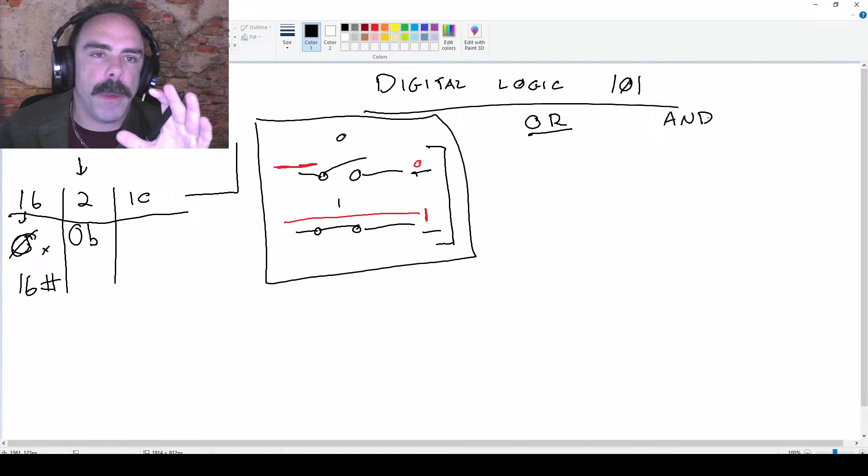So the first thing about how these things work - if you have these inputs, you have blocks and operations. Some of the core basic ones, the 2 most fundamental, are the OR and the AND. These concepts of ORs and ANDs are everywhere in logic in general and in algorithms. Even if you're writing Python code, you're going to use AND and OR operations a lot.

So the fundamental thing of digital logic is a thing called a truth table. If you want to take an OR operation between 2 inputs, from a symbolic standpoint you will have 2 different inputs coming in, input A, input B, and on the output side we'll call it Q, because that's kind of the Siemens realm of it. An OR block has a symbol that has a little curved line, like that.

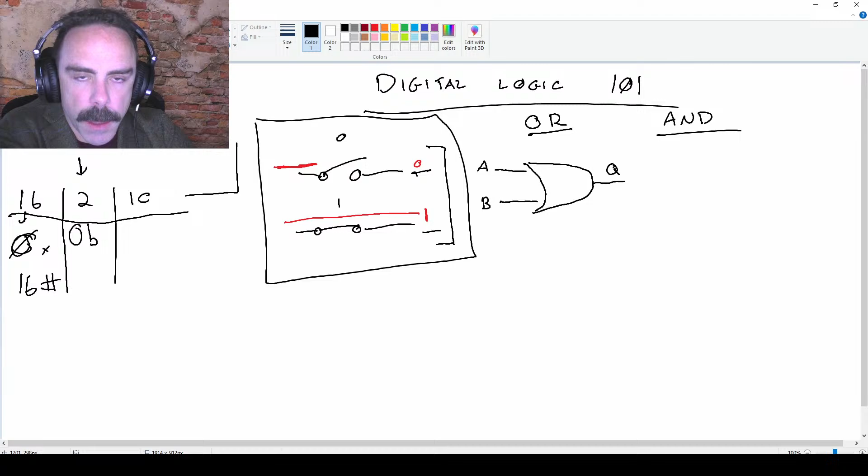And there's a thing called a truth table. So if we were to say, what are the different options for inputs A and B, because of this kind of symbol we know that each one can have a 0 or a 1. So you can have A be 0, B be 0, A be 0, B be 1, A be 1, B be 0, and then both of them 1. So those are all of the options for our inputs A and B. Now this is called a truth table.

The reason it's called a truth table is because we want to see when our output is 1, and in logic our output would be true at that. So when is our output going to be true? What combination of inputs, based on what type of operation, is going to make our output Q true? For an OR operation, think of it as if either A or B is true, then the output is true. Fairly simple - if either one is true, our output will be true, and the only one that will be 0 is when both inputs are 0. Pretty basic, pretty simple stuff. This isn't supremely groundbreaking, but it's fundamental to build up to greater concepts.

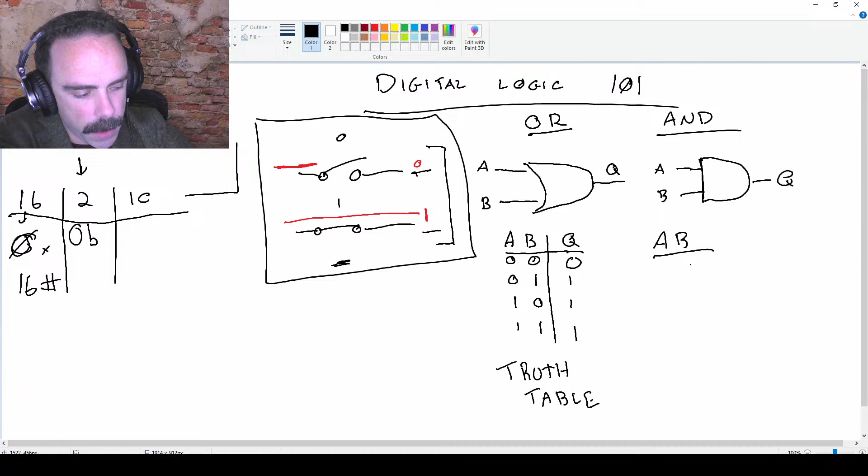So an AND block is similar. We have A and B, our symbol is a little bit different, a straight line. And then Q. Its truth table for 2 inputs is always the same: 0,1,0,1,0,0,1,1. For an AND operation, the output will be true if A and B are true. So we can go through here, and the only time this will be true is here - everything else does not meet that qualification. Fairly simple.

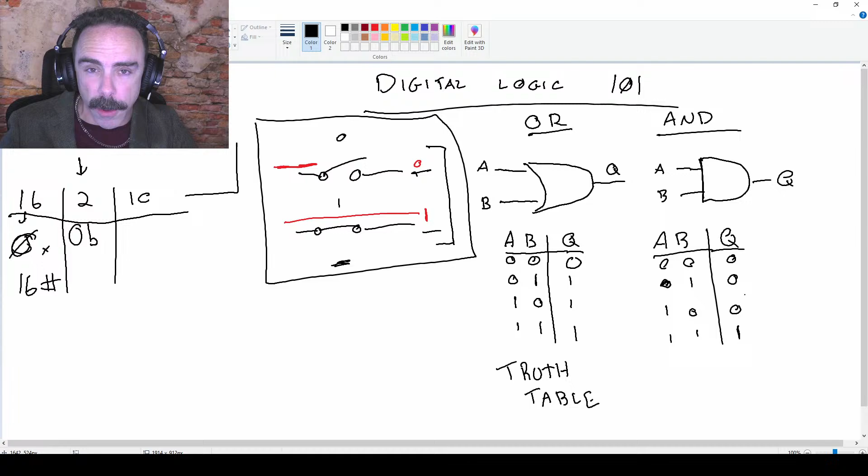Again, if you have any questions at this point, it's fairly basic. You've got a transistor that can either be on or off, and you're creating these logic devices and logic tables. Right now none of this really ties together to anything, but what they end up doing later on is building up a structure that actually makes this logic. We're not going to go into that - we're just going to get these concepts so that if you have a conversation with someone talking about this sort of stuff, here's the basis of it.

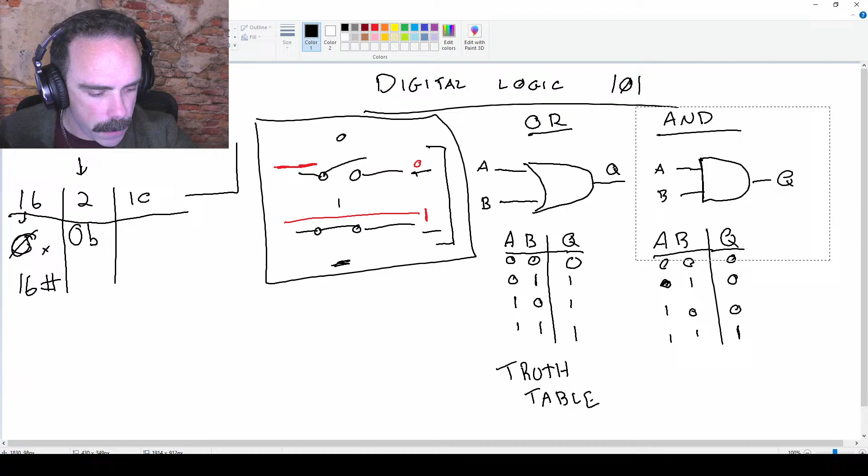So let's go through and clear some of this, and let's recopy over here what we had.

Because ultimately, we could do this whole sort of thing in actual switches. Like a PLC is kind of a modern version of what's called relay logic, because with a physical relay you can actually do ladder logic, the same concept with just relays. If you go into an old plant - there's a couple of steel mills in Alabama, metallurgical plants I've been into - they still have processes being controlled by relay logic. They're actually using this sort of logic to make decisions on how to run their plant, which is kind of wild, and it's all physical relays, no PLC, and it's crazy. The transistor was invented in like the 40s, so all the way up until really the 70s and 80s it was all relay logic, which is insane.

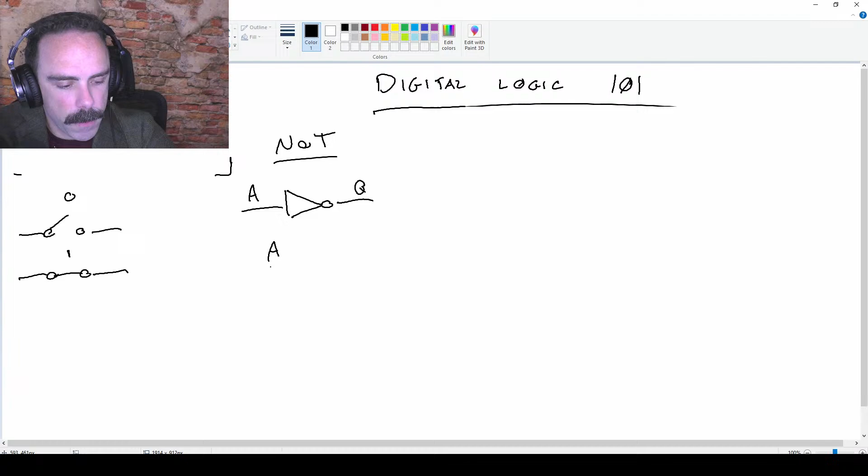So getting off topic, but back to digital logic - the next thing we'll talk about is we have what's called a NOT, and all it does is it takes one input, looks like this, and the output. So the truth table for this, if A is 0,1, it's just going to invert it. That's fairly simple.

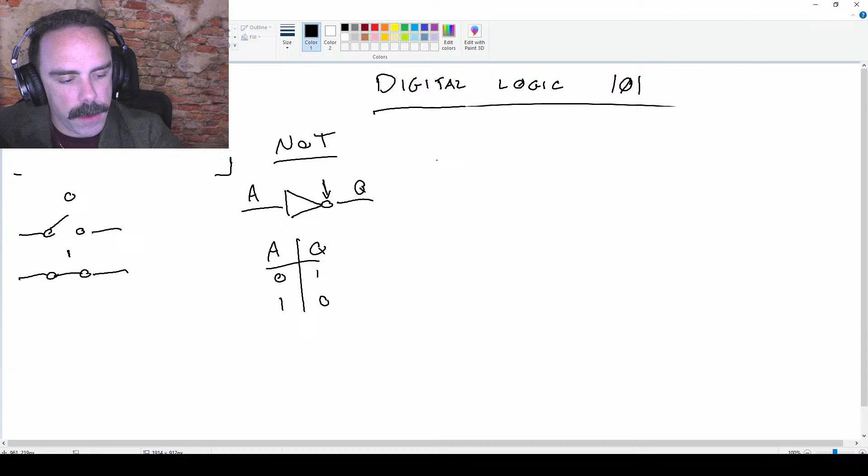So here's the thing about it - the NOT is really designated by the little dot there. And so what you can do is you can stack this NOT onto an OR like that, and an AND like this, and you will create...

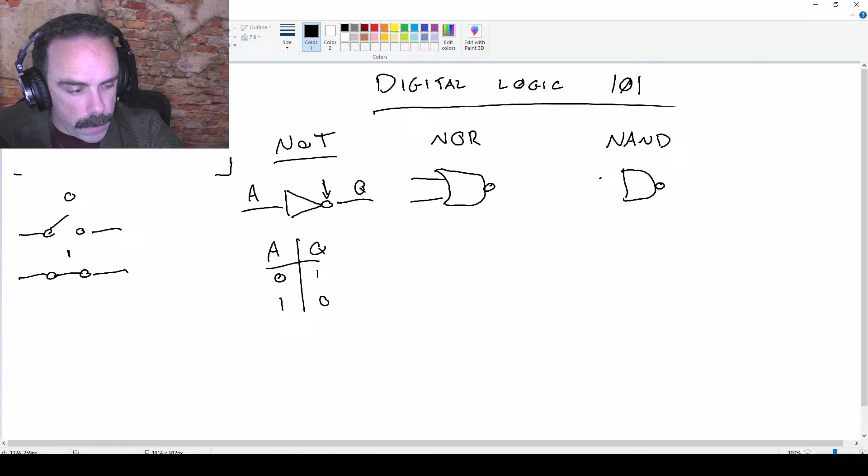So this is an OR, now it's a NOR. This is an AND, now it's a NAND. And the truth table for these guys: A, B, still the same, 0, 1, 0, 1, 0, 0, 1, 1. Now, normally, a regular output for an OR would be either or. So it would look like this. Well, for a NOT OR, a NOR, it's just the opposite.

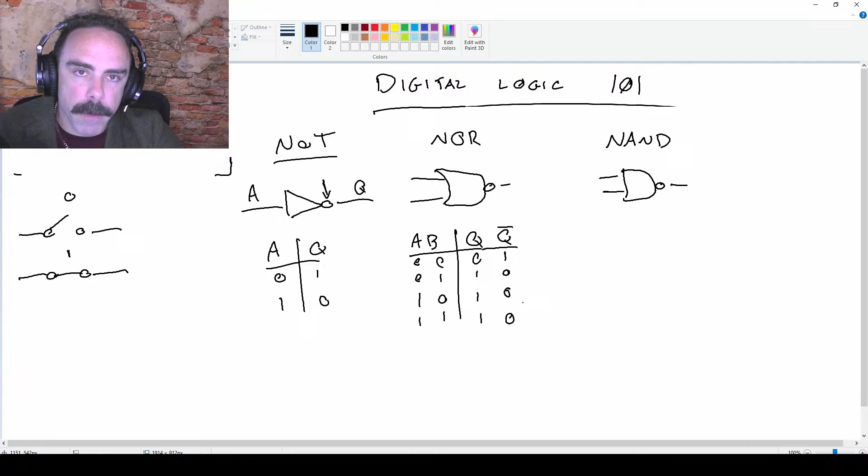Fairly simple. This little symbol here, that's another designation for NOT. So if you see a bar over the top of an input or an output, it's NOT. Now, you can build up pretty complex circuits by doing some interesting stuff, because this little block right here doesn't have to just stay there. It can be over here, it could be here, get all sorts of stuff. But we're going to talk just about that right now.

So the NAND, in a similar fashion, A, B. So we'll do Q and then Q NOT, same way, just to kind of get the process. So B, 0, 1, 0, 1, 0, 0, 1, 1. So Q, both of them have to be, it's an AND, right? So normally it would be like this. Right? Because it has to be A and B in order for it to be on. So that's regular. So we take it and we go 1, 1, 1, 0.

Now, that's the core concept behind logical operations. And the reason we go through this is if you really want to get into learning about logic, and we'll tie those later to the PLC concepts, but when you're doing ladder logic, an AND would be a rung of logic that looks like this: A and B and then a coil. So this would be the equivalent of an AND, right? If you're used to ladder logic, this makes sense. A and B both have to be on in order for Q to turn on.

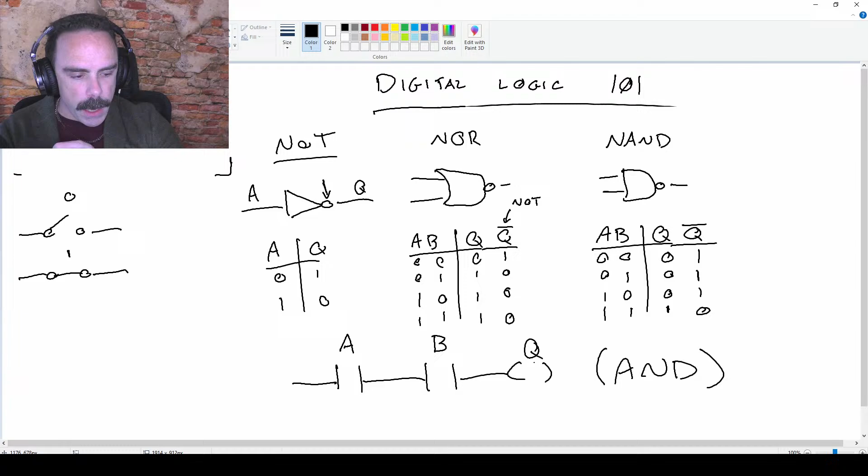Well, here, let's see if we can get a little bit more. If we have this logic, oh, that is an OR, right? So same concept, same logic. And again, with a PLC, especially in ladder, it is based around these logical functions. It's based around logic. And so that's why PLCs and digital logic get pretty close to each other, tied pretty close in. So that's why we're talking about it.

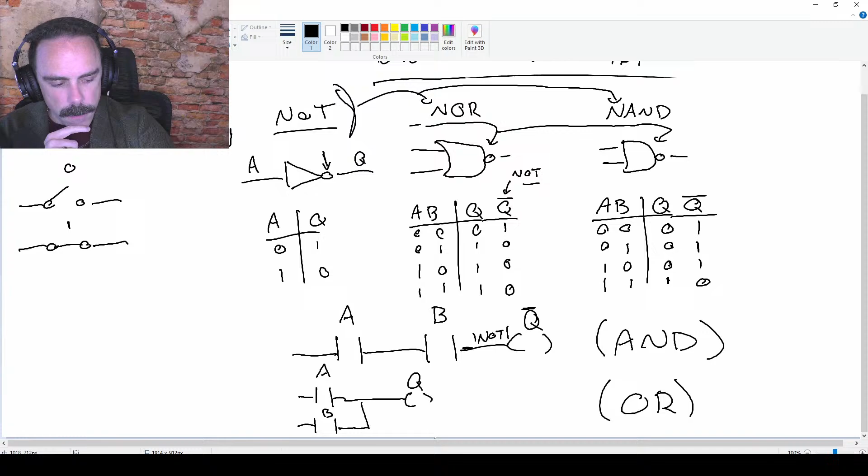So same way, we put this little NOT symbol here, and then we added it to here. And essentially we added it like this, right? So we've gone through and looked at this. And so if we were to invert this, and in PLC there's a NOT here that inverts it, you could get a NAND, and if you could invert this by putting in this little NOT like that, you could get a NOR. All right, well, that's one way to do it.

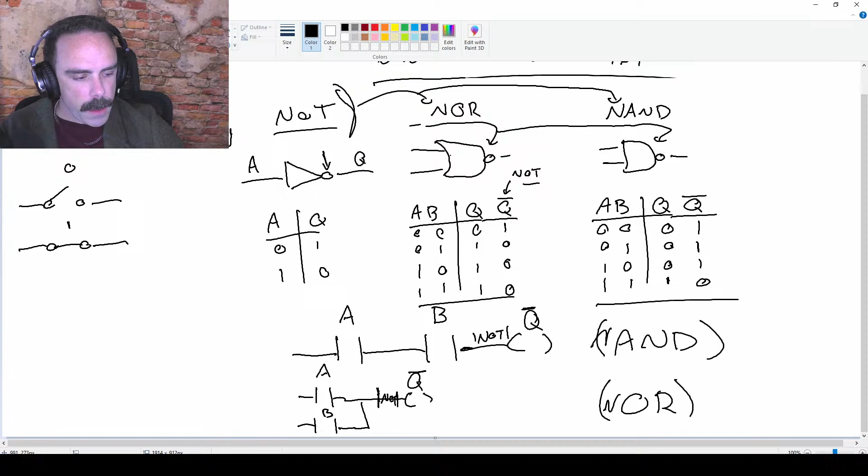Or you can do some logic with our truth tables. Remember I said that we could put the NOT on the inputs? We could do this, right? We could put that little NOT on the input. Well, let's look at the truth table for that, if we were to NOT both inputs of an OR. So A, B, normally our inputs would be 0, 1, 0, 1, 0, 0, 1, 1.

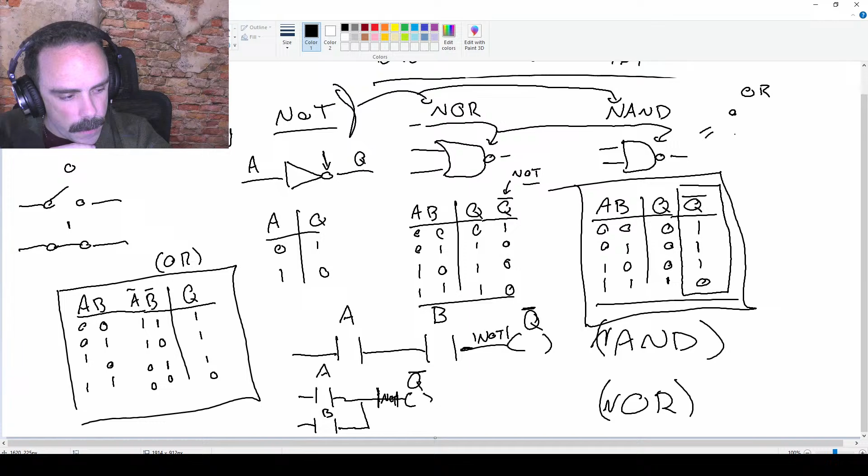Let me do the same thing that we did over here. Let's NOT our inputs. So the NOTs would be 1, 0, 1, 0, and 1, 1, 0, 0. And if this were an OR with both inputs NOTted, it would look like 1, 1, 1, 0, right? Which, oh my gosh, look, that truth table is the same as this truth table. So a NAND must equal an OR like this.

What does that have to do with anything, right? Okay, you're like, okay, cool, that's so useful. Well, if you take that same logic and bring it down here into the PLC world, guess what? Instead of having to do this NOT here, you could just do an OR and invert both inputs. So that's pretty cool. And that's all we're going to do.

There's a ton that you can go into, and it's called reducing functions, reducing logical operations. And you can cascade these things, really complicated. But if you want to start playing with those sorts of concepts, use these truth tables and those three blocks, the AND, the OR, and the NOT, and just start playing around with them and write different combinations of truth tables.

And you might discover things like an OR with the inputs NOTted, so inverted, becomes a NAND. Things like that. Guess what? You might find a relationship between a NOR and the AND block. Probably the same thing. And so you don't have to have these sorts of output inversions, because you can change the way your code is structured and then invert the inputs like we did here.

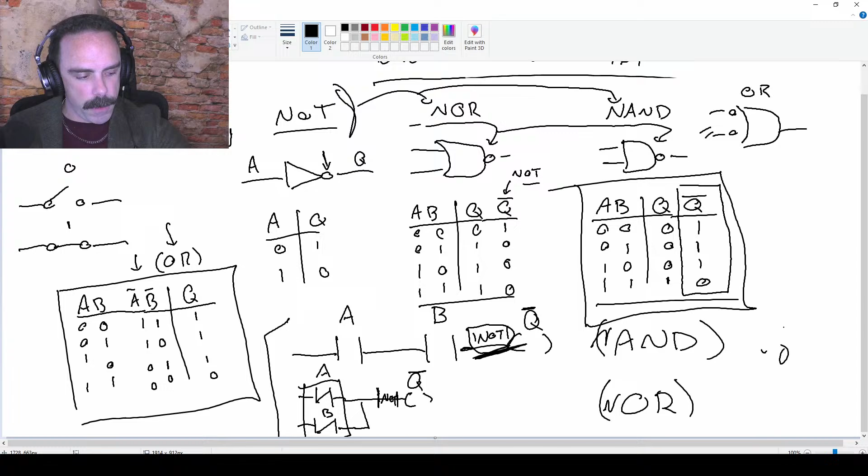But let's get back to the next part of what I wanted to talk about, because we've been going for about 30 minutes now, and I started to talk about number representations before. I'm not gonna go control A yet. I'm gonna do this and then hit control A and then delete everything. We're gonna start fresh, because we're gonna talk about number representations.

By the way, I kind of got, not really in trouble, but had an issue with registering some documents, and apparently my L's and C's kind of look the same if I get in a hurry. So I need to be more careful. Also, my zeros apparently look like E's. Sorry for that. I have terrible handwriting. I think we all do. If you have bad handwriting, raise your hand in chat, because I think every engineer is required to have bad handwriting. Let me get my distraction device undistracting. Wow, that probably sounded terrible.

So next thing we're going to talk about is number representations, and we kind of hinted at it. The three that we deal with as programmers in automation programming are binary, decimal, I don't know why I wrote it that way, binary, decimal, and hexadecimal.

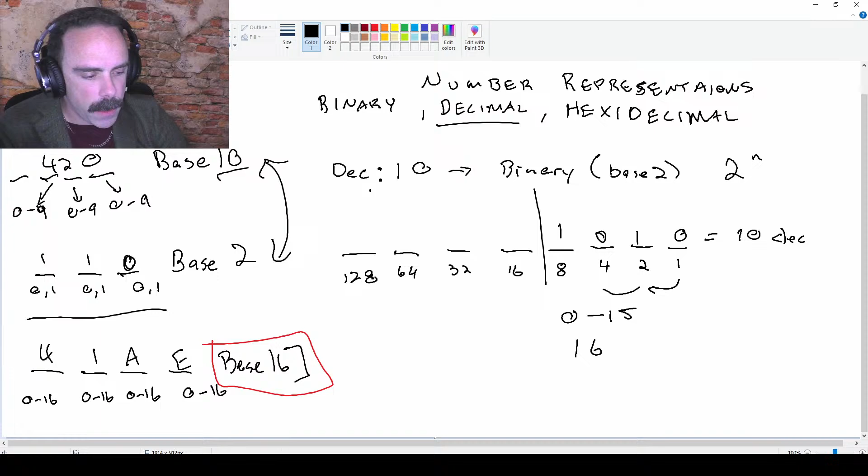And there's a reason why a nibble would be important. Because these 4 bits represent 0 to 15, or 16 total places, right? And I kind of highlighted this earlier. 16 is kind of an important number. It's that base 16 number here. So let's take this. This is 10. So we could represent these 4 bits as the decimal of 10, and that would be a hex number A, right?

And then if we had, say, a byte, let's just throw some random bits in here. Let's look at this next little thing. So let's just start adding. 1, 2, 4. So 5. 5 plus 8 is 13. So A, B, C, D. So this could be represented by D, because that equals 13, right? A, B, C, D. Yep, 13.

13. 10 is A. 13, is that right? If that's wrong, yell at me in chat. Just boo me. But so now this big number here, which would be fairly kind of difficult to add up in binary, actually just comes out as DA hex. So hex representation DA. That's what this big binary number is here.

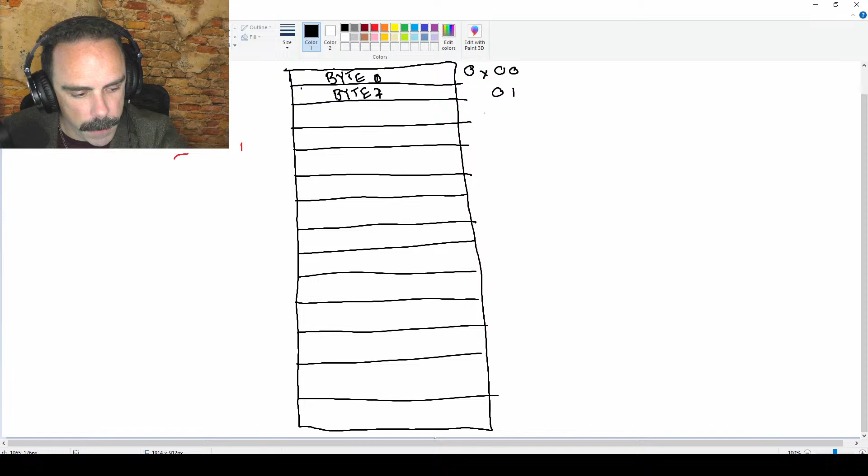So we're going to call this byte 1, byte 2, so forth and so on. Except we're going to start at 0. So this is going to be 00, 01, 02, 03, 04, 5, 6, 7, 8, 9, A, B, C, D. So these numbers over here, we'll call these our actual address.

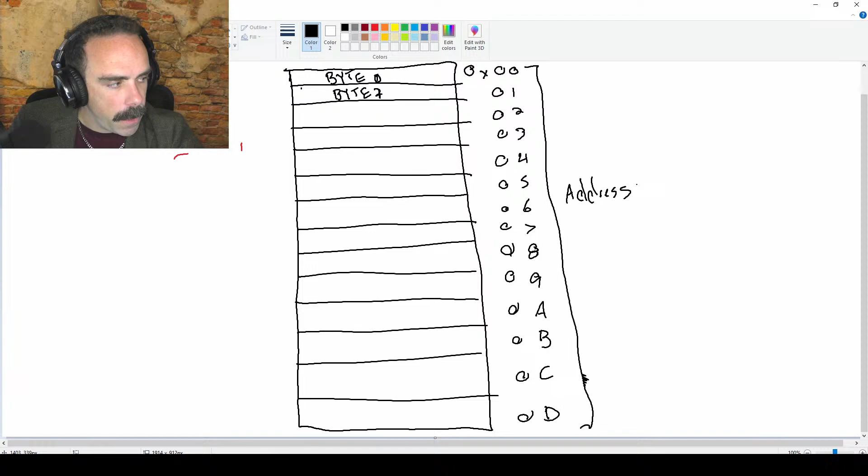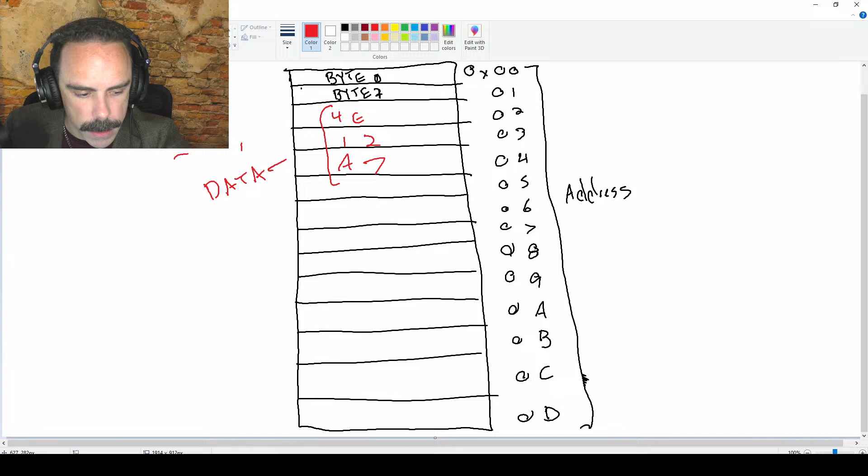So this is going to be our address. Now, what is inside of them is going to be 8 bits in these bytes. So this could be 4E, 1, 12, A7, blah, blah. So this is the actual data. What's in red here is the data. And those are two different things. The address and the data might be the same, probably not.

Because the address represents where it is in the physical memory. Your physical memory is just a set of what are called registers. And in the computer architecture world, those registers have an address. And each point as you're going down through contains data and some extra stuff for how to actually address it. So it'll have an address and a data. We're not going to go too much into this, but the size of your address means how much you can actually store.

It wasn't too long ago that 64-bit processors weren't really available to the common user. Most everything was 32-bit. Well, that limited your addressable memory space to a little over 3 gig of space. So you had to start doing tricks in order to address anything over 3 gigs. That's why you could only have 4 gig of memory, because of this address only being able to be 32 bits.

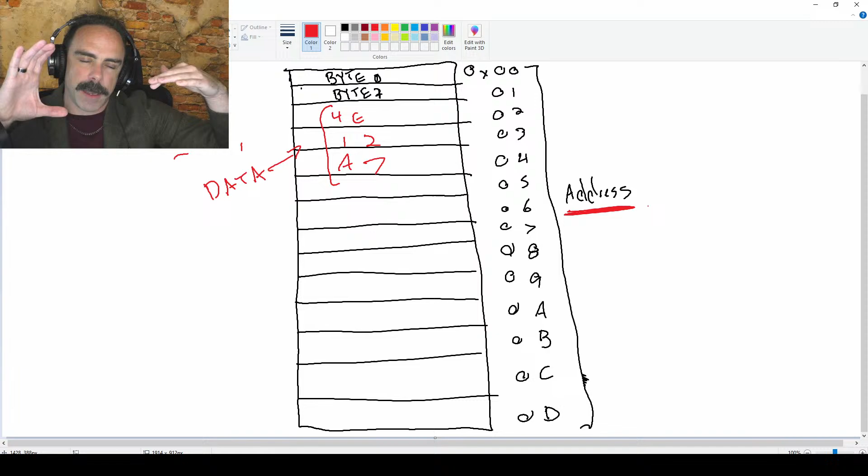Back before, imagine you only have so much space that you can physically work with on a processor, because you have all these transistors that make up all these logic things. You can either make your processor bigger, or if you want to add more stuff, you can make transistors smaller. So that's kind of what processor technology has done over the years, making transistors smaller so you can put more stuff in that space.

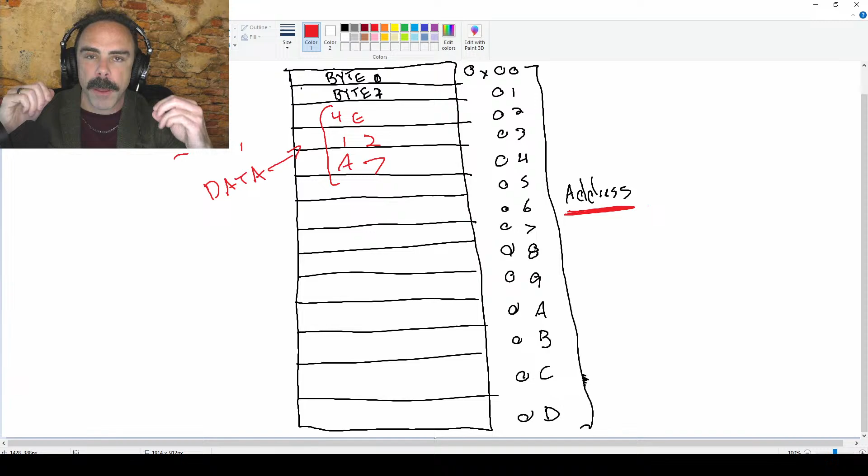Once transistors got small enough that we have this space to add extra instructions, it becomes less costly to actually take up the physical space to make a float multiplier. To do float multiply very efficiently, you need its own specific little area of the chip. It's like buying downtown New York City real estate, very expensive, so it better be worth it. That's the biggest thing with older processors, more so than the bit structure—it just made it even more expensive.

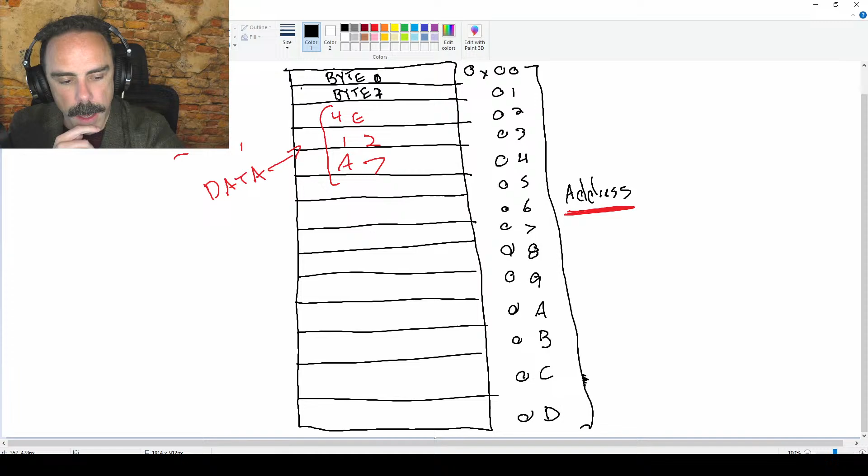So back to this kind of addressing. We talked last week about pointers, and the core way a processor works is it has this space, call this our memory space, but then call this memory. Well, you have this other space that's called the program space. And it's the same thing—all it has is a bunch of addresses and data. So it's addresses and data.

What your code does is, in layman's terms, it says: start at this point in the program space, do this instruction, then this instruction, then so forth and so on. So it's literally just a list of instructions—a list of these machine code instructions that we had before.

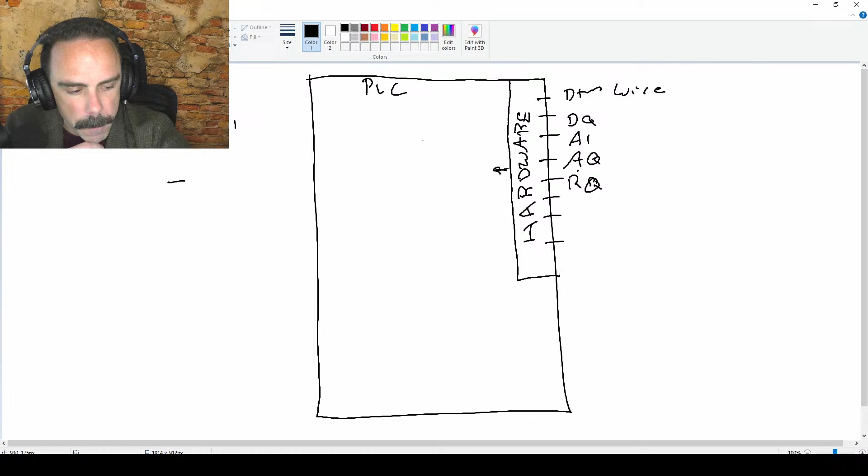And this is the actual hardware, an actual processor that is interfacing into that physical wire, like that. Here, that then goes into a place called your process image table.

And your process image table is just a place of memory. Remember, when we're talking about memory, it's just a bunch of addresses that store data. In this case, the process image table communicates with all of that hardware in some shape, form, or fashion - doesn't matter to you right now - and it brings in copies of all of this data. So there is a process in between here that goes out and updates each one of these individual things.

That's the process image update. That is a process that you don't mess with. You can configure it if you like getting yourself in trouble, or if there's some specific reason - like sometimes you need a very specific analog updated faster than normal, that's where you would go in and change that sort of stuff. Very advanced stuff, don't worry about that. That's mostly taken care of for you 99.9999% of the time.

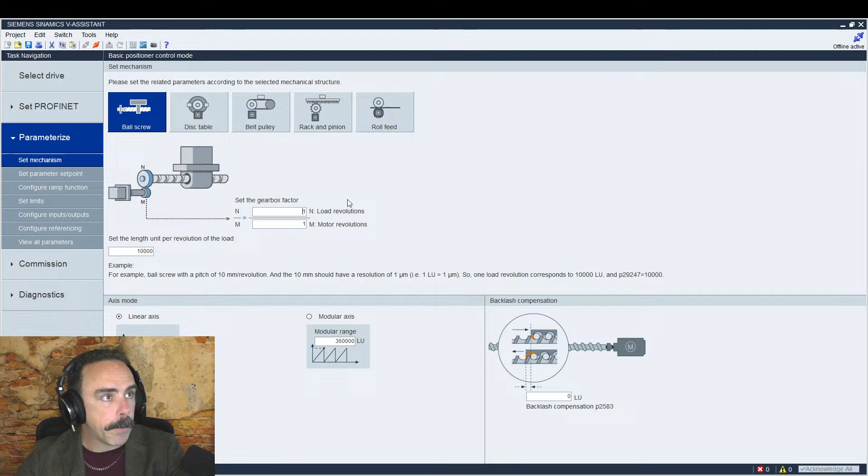Here's kind of the parameterization that you're looking at, and I won't go too deep into this, but I guess I probably do need to go a little bit deep into it. Let me move it down so I can talk about this, because this is probably the most important thing in Epos - getting this set up correctly. Oh, that is totally the wrong thing. I want that, and I want to move myself over here like that.

So what we have is our gear ratio - that's the first thing we have here. This is, again, probably going to be the most important thing if you're using Epos. And if you've ever used Epos, you're screaming 'yeah,' because if you get either of these things messed up, it messes up everything. So don't do any programming until you fully understand what's going on here. Say it again: don't do any programming, because if you change this number, all the numbers in your PLC program will change. If you change this, all the speeds you're actually physically running at will change.

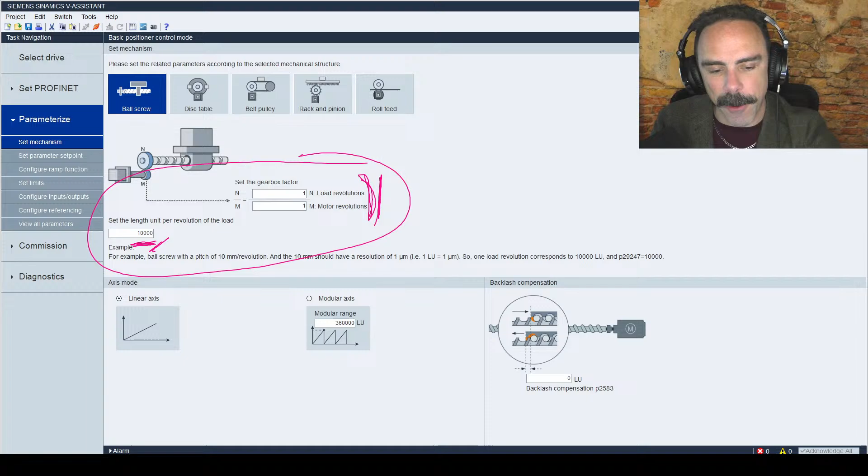So yeah, just please get this set right. This is your total gearbox factor, your total gear ratio. This ratio is on your motor revolutions. You can have a gearbox, a pulley - like a pulley reduction - then a slide, like a rack and pinion reduction. You can have all of these reductions.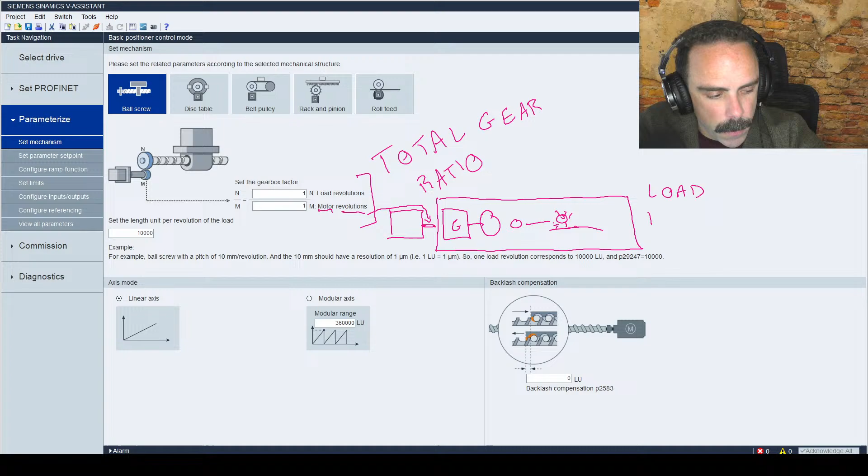You have to group them together to say how many motor revolutions equals one what's called load revolution. Now, in a rotary axis, this kind of makes sense, but we've got to talk about what in the world

Where is it? Where is it? Where is it? Where is it?

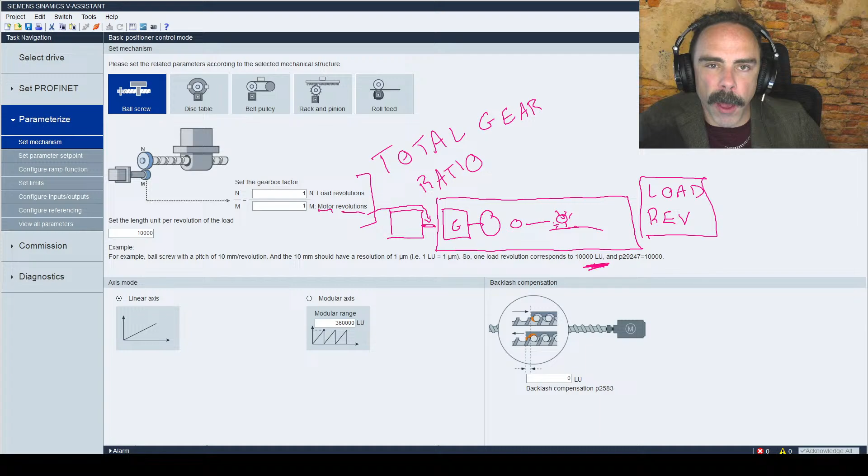What in the world is an LU? It's the most critical concept of using Epos, to fully understand what an LU is. So I'm going to clear this out. We know now that this is just this total gear ratio, but we're trying to figure out what is a load unit and what is a load revolution, because that's the most important thing that we have here. So let's clear this out and talk about what a load revolution is. And I'm going to keep it on this little screen here.

I'm going to move me down here, and we're going to talk about what is a load unit. Or sorry, a length unit, because it's kind of easy to think about if we're talking about,

Oh yeah, so apparently there's a good channel. So Electrical Automation Hands-On channel made a whole playlist explaining these details. So there's definitely other resources out there to explain this as well.

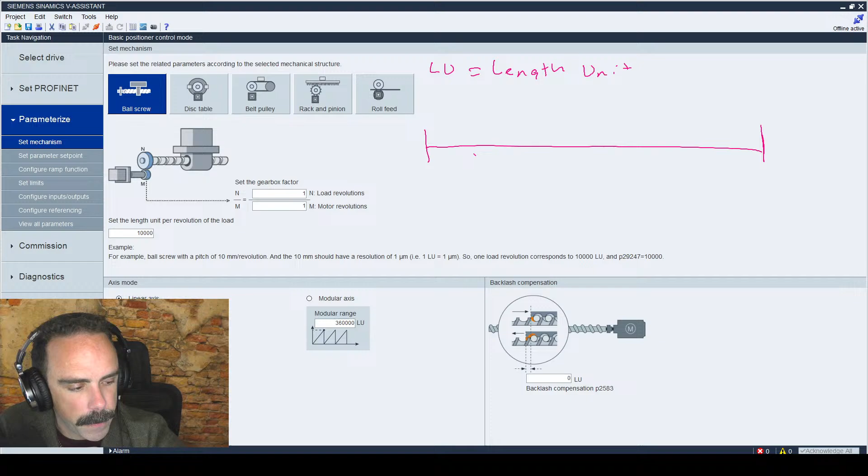So an LU is equal to a length, a load unit, but for right now, because we're working in a linear axis, length unit, that is how we're going to think about it. Okay, so if we are in a linear axis and we want essentially to be able to talk in hundredths of, what's it called, a meter. We want everything in meters, millimeters, something like that. We want everything to be in a millimeter, or maybe we want it in 1/10 of a millimeter.

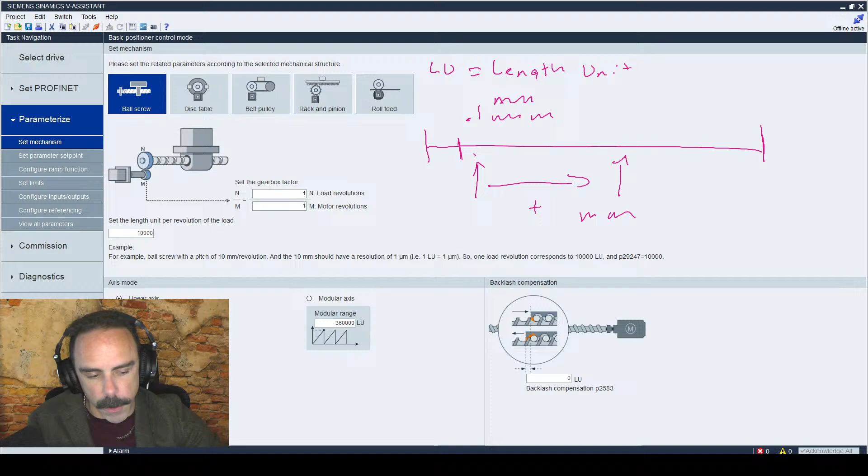And so this is kind of like the length unit that we are getting into. We get to pick what this length unit is. So if we want it in millimeters or 0.1 millimeters, we get to pick it. We get to say, all right, our process is going to move along this line, this direction is positive, and it's going to move in millimeters. So that's what we want. We get to pick that.

And what happens is we want to have this ratio between 1 motor revolution to 1 length of our overall product. So what is the ratio between motor revolutions to the load? And then 1 revolution of our load, that ratio is how much resolution. So in this case, we have a 10,000 length unit revolution.

And it's kind of easier to think about this in a rotary setup. So I'm going to flip this over to a modular. I don't know why it's called a modular. It's a rotary axis with a modular range. That's a confusing thing. So let's think about it from the standpoint of just a simple gear ratio. So if our load unit

equals degrees, and we have a 2-to-1 gearbox ratio, that means the motor will have to go 2 times for every 1 rotation. So our motor would rotate twice for 1 rotation of our load, 2 to 1 that way.

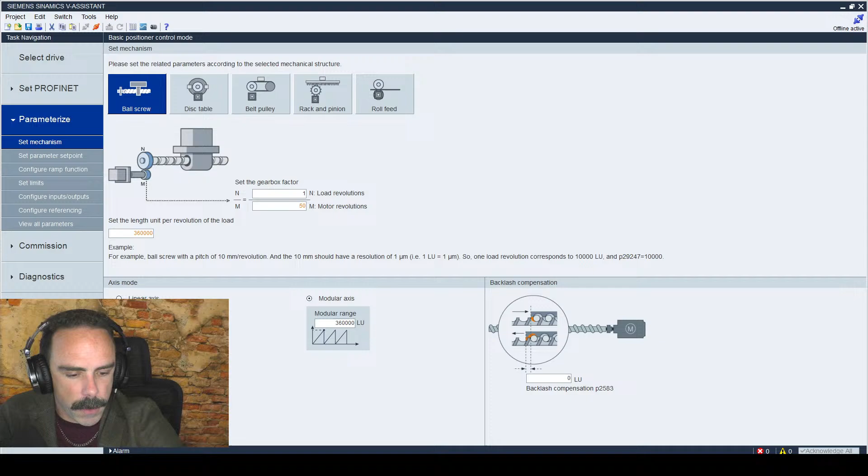So the next couple of parameters that we have here, let me move back over to here. So we're not going to talk about this. This is called the traversing table. We're not going to do that. So the ramp function module is one thing to know about. Now normally you're going to want to have as fast a response as possible. And so by default, there is no ramp function generator when you're using EPos. So if you do a jog, it's pretty much just as fast as it can go.

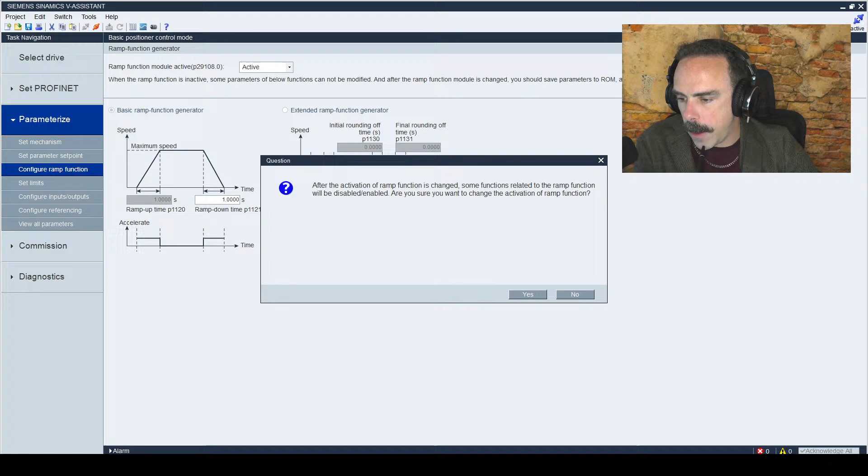So if you're accelerating according to your function in your EPos, it's going to accelerate that fast no matter what you put in there, and that could get you in trouble. But here's an option to be able to configure a ramp function. And the thing about it is, I don't even know if there's a function in EPos, because when you enable EPos, it's a position controlled move. Just like the technology objects, they all are inherently position controlled. You can control acceleration and deceleration in EPos. It's just not controlled with a ramp. It's controlled with an actual acceleration factor, like length units per second squared.

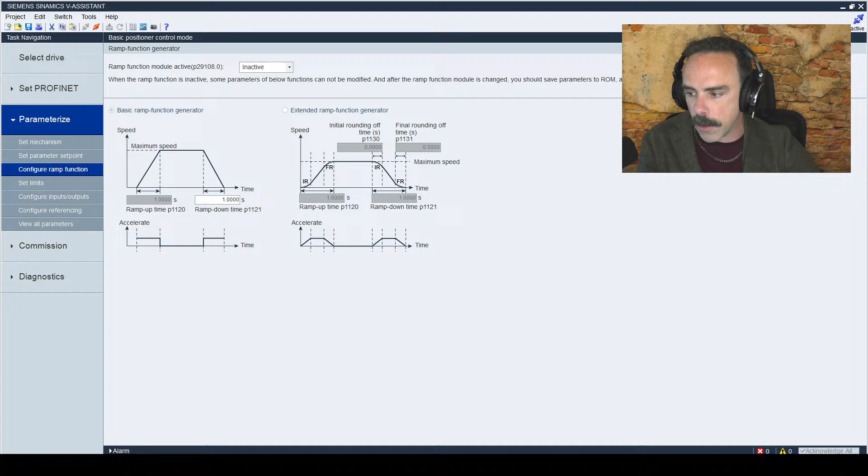So let's look at this. These are limits on the torque limits. And these are basically, you can kind of go through here. Here's the configure the referencing. So if you are going to do an absolute move using the EPos, the axis has to be homed. Now, most of the motors, like these 1FL6 motors, you're probably going to have an absolute encoder on them, and it's not going to be that. There is a place where you can set it. Maybe I missed it, but anyway, there's a place where you just set the reference on your absolute motor.

But otherwise, this is very similar to the homing function that I've talked about in the technology objects. When you execute these functions, it's going to actually move through this kind of profile. And again, if you notice, all of these values are in length units per minute, and your accelerations are going to be in length units. Your total distances are going to be in length units. So again, all of this goes back to knowing what your actual mechanical system is set to. So that is your basic parameters, basic setup on that.

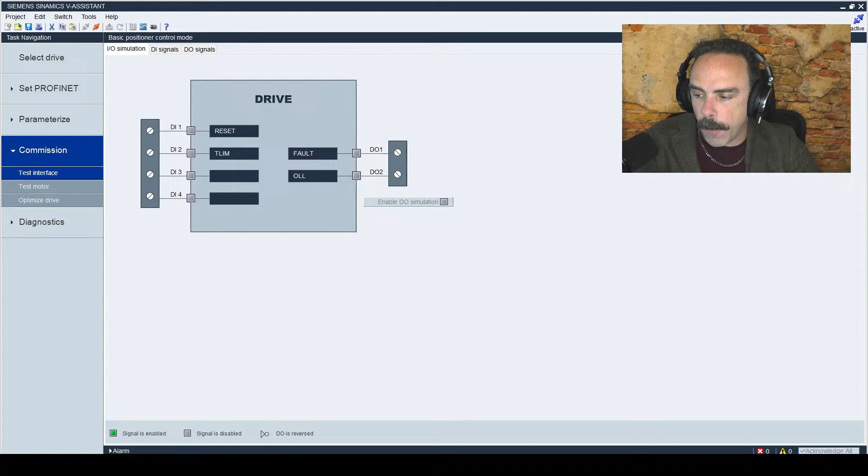Commissioning: if you're using a V90, there's a little optimization, and I think it's one-button auto tuning here. You can go online and actually turn this on, and this needs to be connected up to the system, because it's actually going to go through and see the response from the physical system. And you click that, and here's the dynamic factor.

This is something that I'd just play around with before you're hooking it up to something that's super important, because these dynamic factors can be really dynamic and they can catch you off guard sometimes. But just make sure that you're clear of it. You're not sticking your hand in somewhere while you're doing this that might injure you.

All that to say, I want to go out of V-ASSISTANT now, because that's really basically all it is: going through and selecting the drive, selecting EPos, and then downloading. And there is a button if you were online right here. Remember, on a Siemens drive, you have to copy RAM to ROM. Otherwise, it comes back with your old program.

You work for a while. If you like what you have, you copy RAM to ROM, okay? And that button is right here, save parameters to ROM. That is what you're going to do. It's only available when it's online, and you go from there. And then you can just save your project.

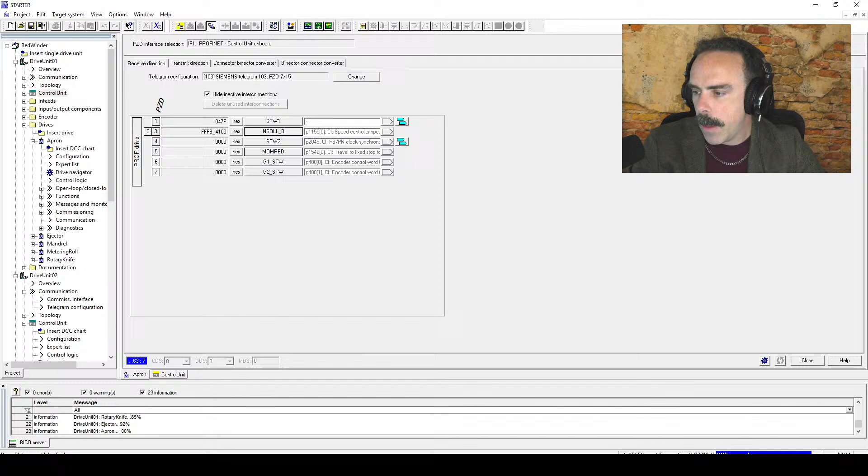And so what I'm gonna do is show you if we are using an axis. Well, let me get you actually over onto something here. Go back to my sketchpad. We're gonna do a project new, and we're gonna insert single drive unit. We're gonna do this on a CU320-2 PN. Yeah, that's all fine.

We'll just click through, configure a drive, because this is what we want. So when you're configuring the drive, you have to set up this technology. Well, I guess we don't do it here. So we're gonna set this up, and then here is where we go through the basic setup. We want to select basic positioner. Otherwise none of these options are going to be showing up.

And then we're just going to kind of blow through here in order to get to our stuff. None of this part really matters. I'm just wanting to explain about the EPos, and because we selected EPos, it is going to have a couple of different options here. Here is where it says what encoder is going to be used for position control. I'll show you where we can change this in a second.

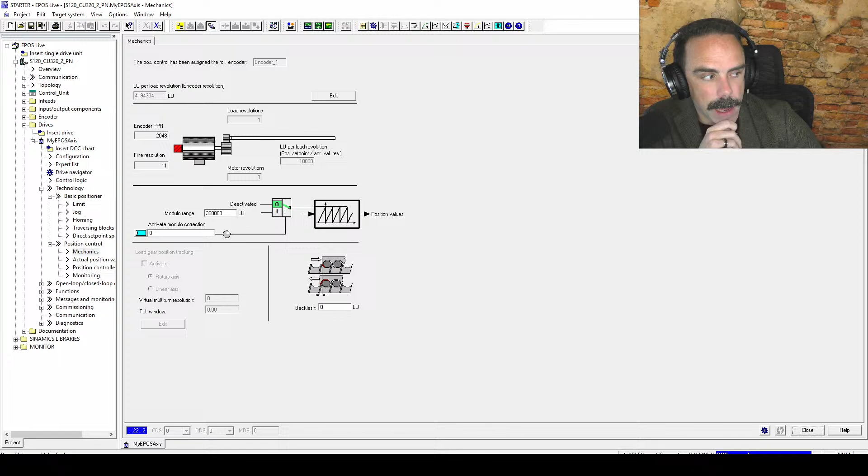So Lucid asked a question: do you have to buy a license to make EPos available in the V90? No, on a V90 it is available for free. But the G120, if you're using a CU250S, requires a license to activate EPos, but not the V90, because the V90 is inherently a servo drive.

Whereas if you're doing positioning with a G120, then you're doing some kind of out-of-the-ordinary stuff with the G120. But obviously you can definitely do it. It's just not normally what it's used for, whereas that's what the V90 is for. So all this stuff here.

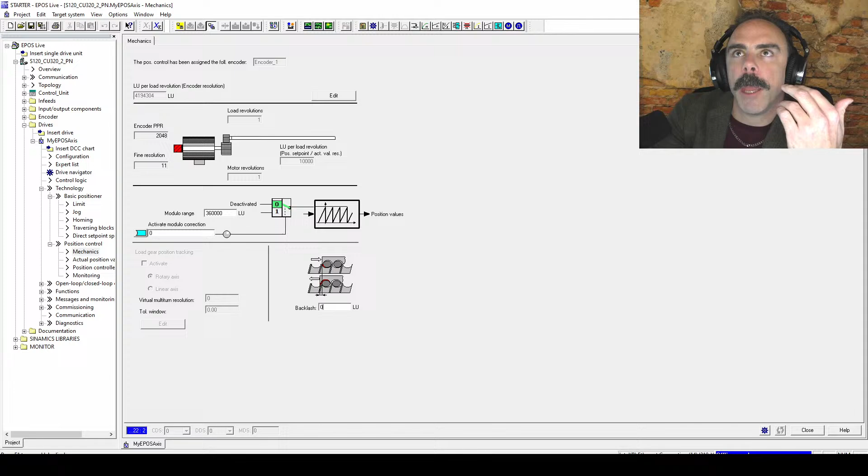One thing I will point out, I didn't talk about it. This is in V90 as well: the backlash correction. Once you figure out how much one length unit is, so if you know that one rotation, like through your gear rotation, one rotation of your motor equals 0.1 inches or whatever, and then that's 1,000 length units, then you know that one length unit equals 1/10,000th of an inch.

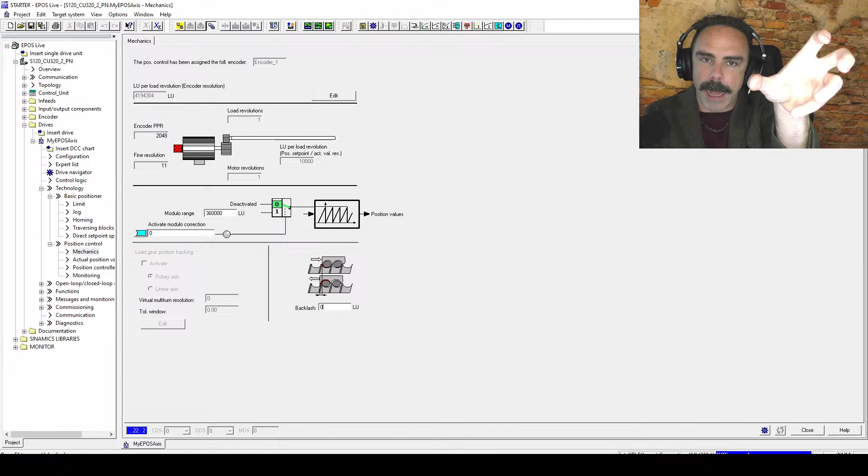Okay, well, this backlash correction here, if you have a gear ratio, anytime that you change direction on an axis, if you don't have some sort of backlash correction, you'll get creep. So if you have a standard gearbox or an old rack and pinion setup, and there's a little bit of play, every time that you take up that backlash, it's going to be pushing like this. It'll be moving in one direction, and when you reverse it, the motor is going to move back in the other direction, but the gear itself is not going to move. So your load is not going to move.

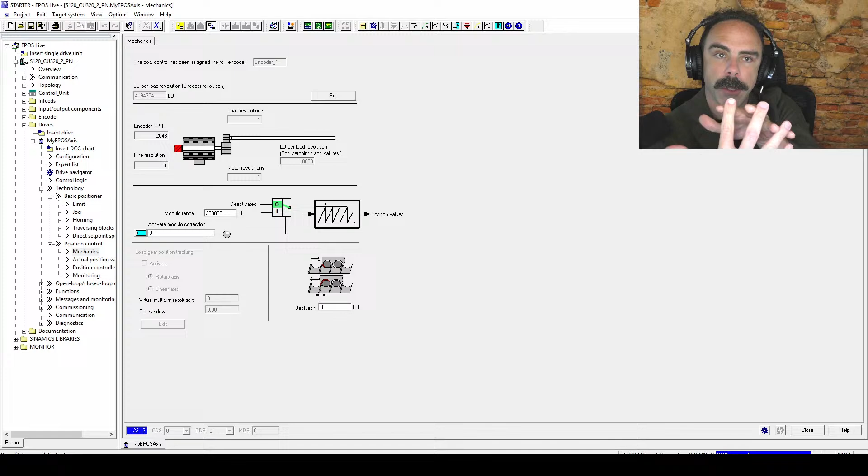And so every time you reverse direction, you're going to induce whatever your backlash is as an error into your overall performance. So if that backlash is, say, 30 length units, then every time you reverse your motor, your end result is going to be 30 length units wrong. So once you get your system set up, put your length units into the backlash correction, and this system will work a whole lot better.

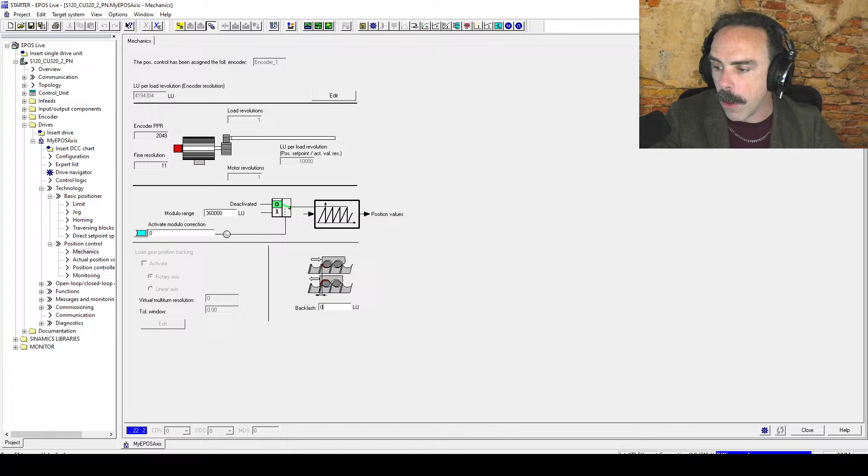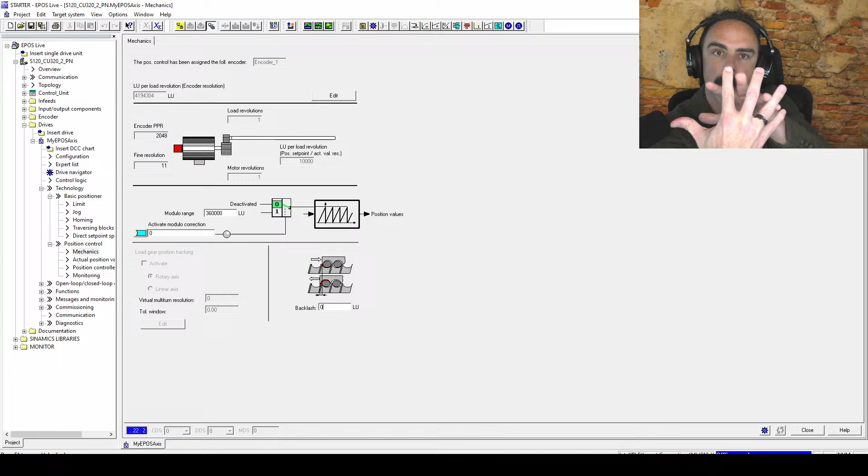All that's doing is, every time it reverses direction, if you have 30 length units of correction, it's going to add 30 length units to the overall set point. So if you have a 1,000 length unit move, the actual move that'll get loaded into the Epos will be 1,030, because it needs to move 30 length units first before it even starts to move. Makes sense? Hopefully. So that was mechanics.

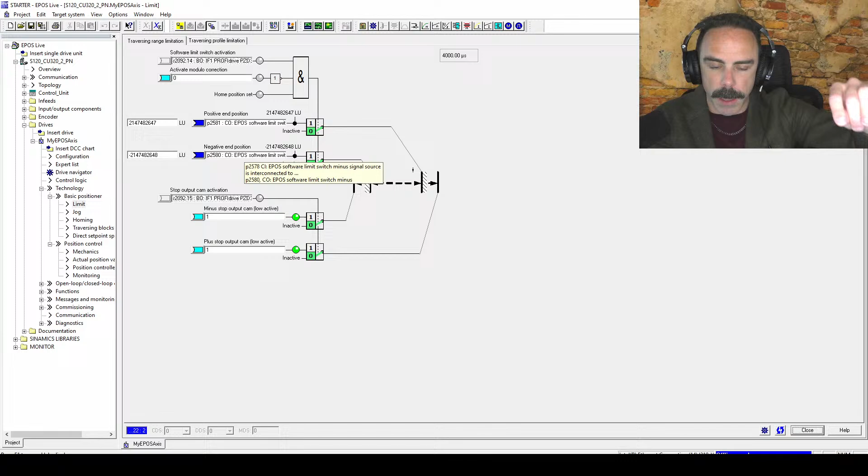A couple of things that you have in Epos. You have your range limitation. You have hard stops and soft stops. Your software end stops need to be inside of your hardware end stops, in theory, right? So if you lose your actual input here, which can be a digital input, if you hit this hardware end stop, it actually faults. So these equal fault.

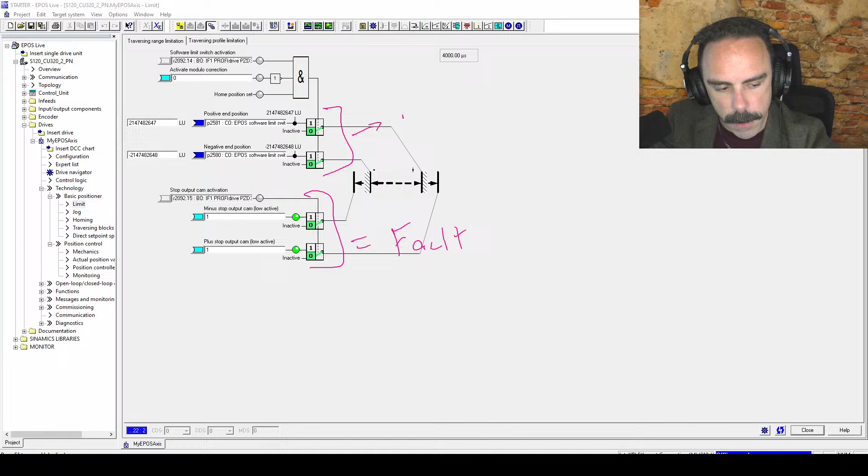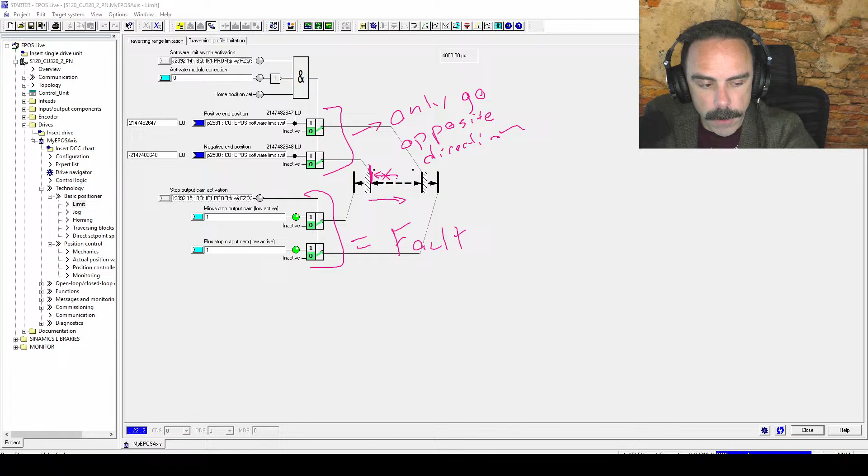These make it so you can only move in the opposite direction. So for example, if you're moving in the negative direction and it hits this, it won't allow you to move negative, but it will allow you to come off. Negative will get removed, but positive would be okay. So that's what these end stops are, and that's built into the Epos.

Let's see, traversing profile limitation. These are your actual velocity, acceleration, and jerk. And remember, these values only make sense if you really understand what your length units per revolution are, your load units. So that's basically what that is.

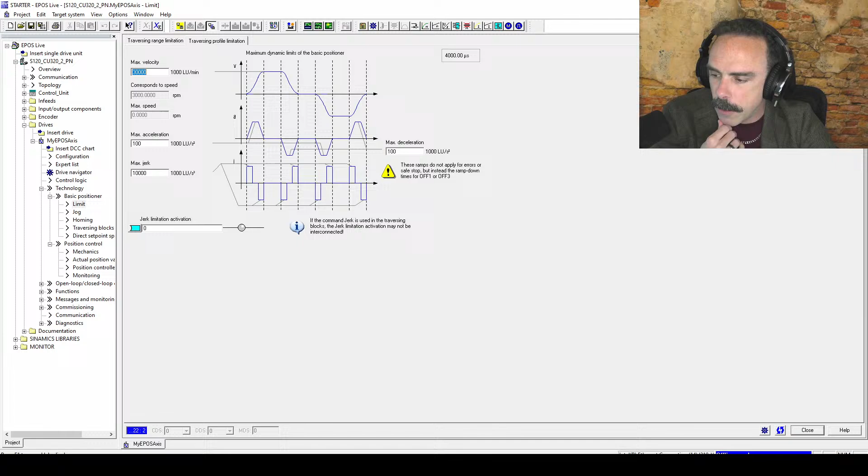What I really wanted to get into was what's called MDI, and here it's called direct set point specification. What is MDI? I'm sure that's German for something, right? But we're going to talk about all of the signals on here, because these signals, you notice, are all signals in the PZDs. So these are all PROFIdrive. So all these are control.

Okay. So what MDI does is you are giving it a position set point, and you kind of see it here. You're sending in a position set point and some other parameters, and it's going to accelerate up to a velocity and then decelerate down to your position set point. So the PLC sends the position set point, and the drive takes care of it.

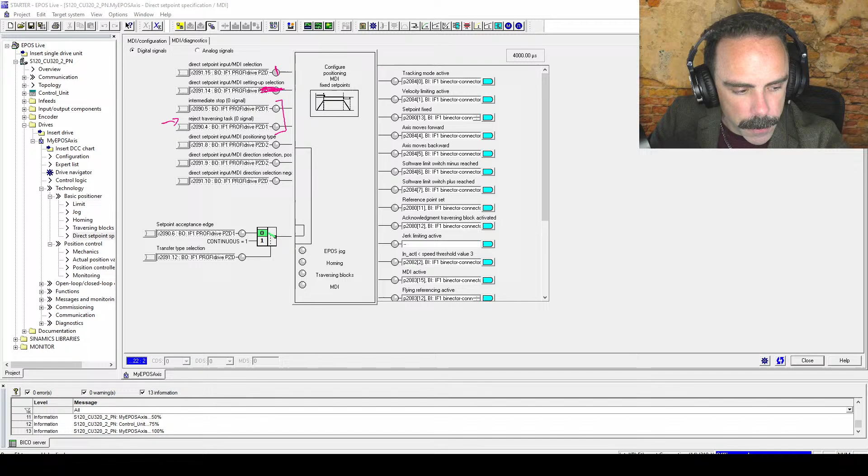These two things are kind of like your e-stops and a pause. So let's talk about it. This bit here is called your reject traversing task. You're just rejecting it. Think of this as kind of equal to an e-stop. It's not an e-stop, but it serves kind of the same thing. It kills the motion, you've got to refire it. Whatever it's doing, it stops it.

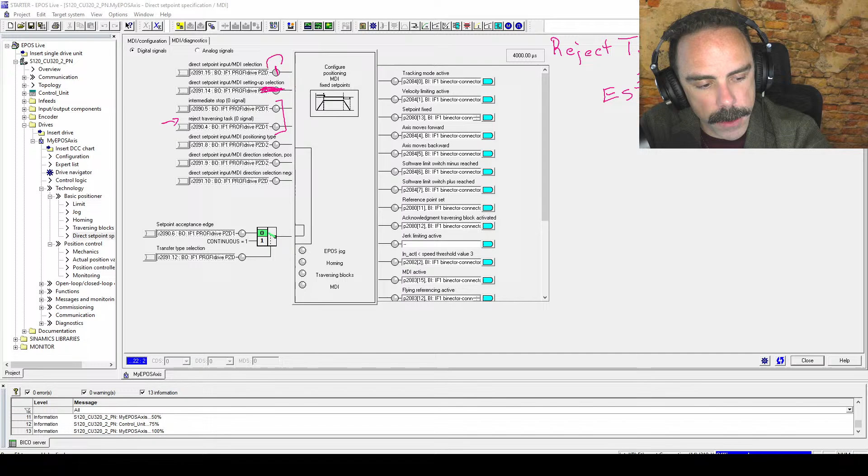Here's one thing though. If this is on and this is not on, you will get a warning, an alarm called reject traversing task missing. If it was in the middle of a move and you withdraw this, you will get a fault. It'll say reject traversing task withdrawn while traversing.

You have to turn this on in order for anything to work. You have to turn on your MDI first. Then you have to turn these two signals, the intermediate stop and the reject traversing task, on first. Both of those have to be on, and then you can trigger a move. So the intermediate stop, you can think of it as a pause.

The way this block works is you send it some set points and then the drive starts moving. What if there's a reason for you to hold up for a second, wait for something to pass, and then continue on with the move? That's what this intermediate stop is. It is kind of like a pause button. You say, hold up for a second, and then go back to wherever you were and continue on. Both of those have to be 1 in order to move.

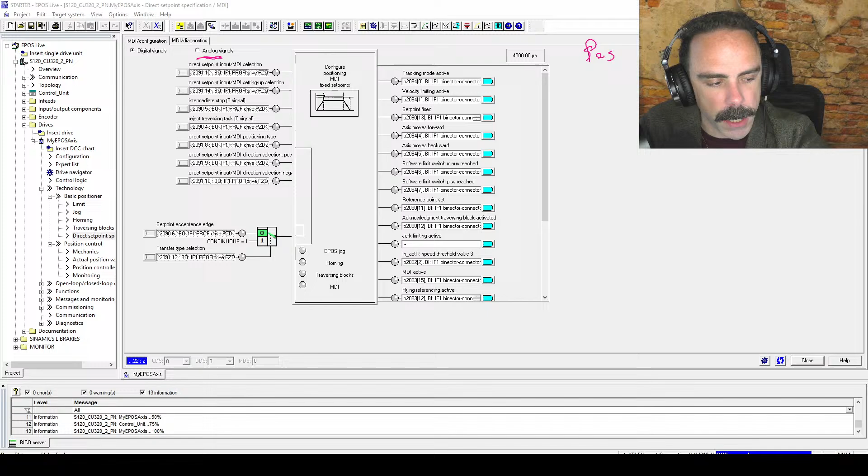This next one is a selection of positive edge or continuous trigger. We haven't shown these analog signals, but you send a position, velocity, acceleration. Do you want this to get updated only on a trigger? Actually, I'm lying, that's this. That's direction selection. Do you want your block to move in the positive direction to meet your set point, or go the shortest distance? If both of them are on, I believe that means shortest distance. If that's wrong, be sure to comment and correct me.

What I was talking about is this little thing here, your actual set point acceptance edge. It's your trigger button. You get all your set points set, and then bam, you tell the drive to go. You set the position, the velocity, your acceleration. Go. This transfer type selection means, do you only want to transfer it on a positive edge?

A positive edge means it only triggers a new move here. Each one of these edges would trigger a new move, whatever that move is. Even if the previous move was not done and you triggered a new move, it would override it if this was 0. If this is 1, you don't use an edge.

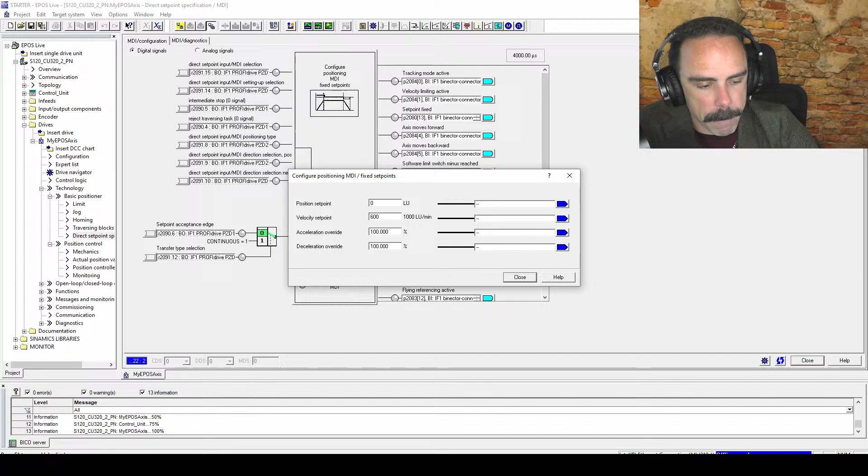Now let's click on this block for a second. These are just fixed set points, and then let's look at the analog signals. Pretty straightforward here. Wrong one, sorry about that.

These are pretty much straightforward. All of these are what you would kind of expect: MDI position set point, velocity set point, acceleration, deceleration, and then the mode. So those are kind of what you would expect, our technology object stuff. And remember, all of these are in load units, so it's the resolution and all that you set before.

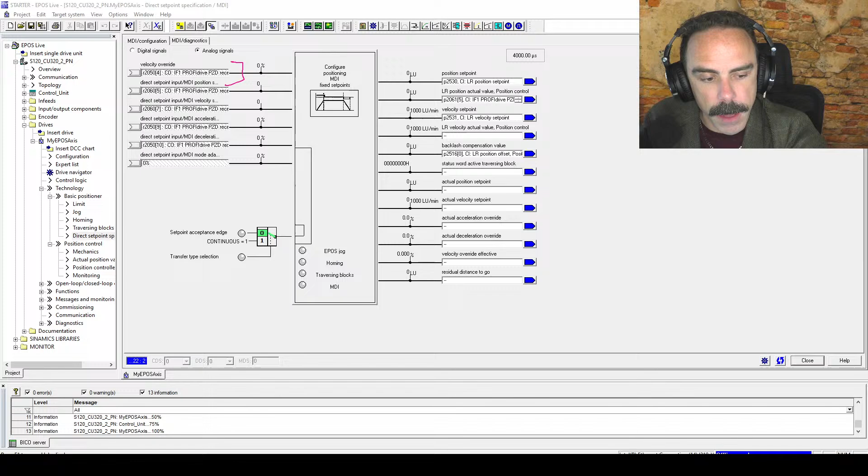Let's talk about this velocity override, because if you want to talk about one thing that'll mess you up quicker than anything, it's this velocity override. We talked about this in the technology object stuff. This is the same concept: no matter if this velocity set point is set to a billion length units or load units per second, if this velocity override is set to 0%, the thing's not going to move.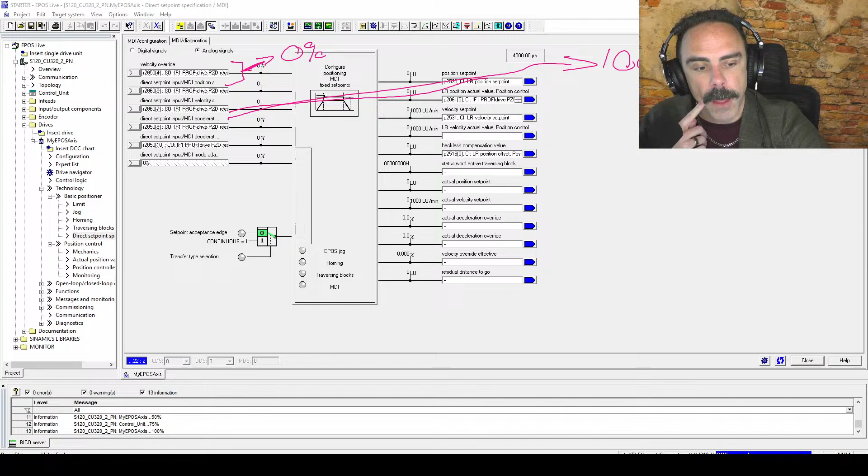It's just going to sit there and say, hey, I'm working, but nothing's going to happen. We'll look at the status signals here in a second. So the first thing you need to do if you're troubleshooting this is make sure that your velocity override equals 100%, because that means your velocity is 100% of your set point velocity. That's what that override is. Obviously, if it's 0, it's going to run at 0% of your set point, but it's going to say that it's running, and it can get kind of annoying.

So we're sitting at 2.5 hours, and this is kind of the basic overview of MDI. I guess what I'm going to do next time is talk about the SINA_POS block specifically, because if you want to dig into this MDI function, there's no better way of doing it than using the SINA_POS block, since it kind of takes care of some of this stuff, like this mode adaptation.

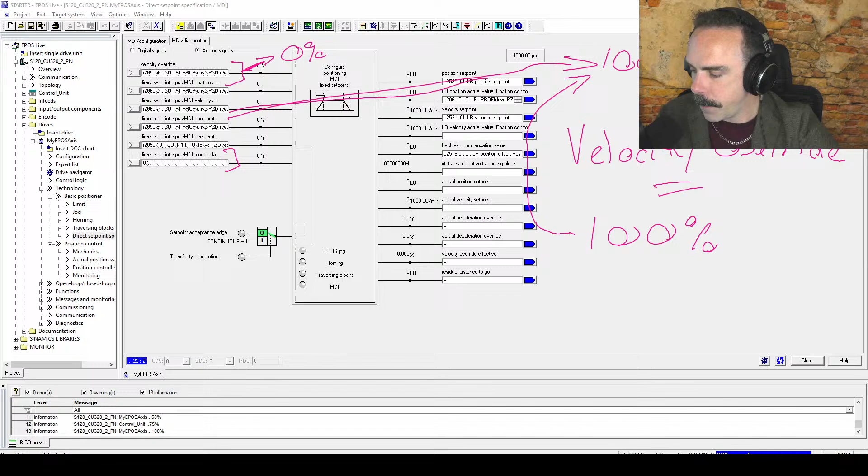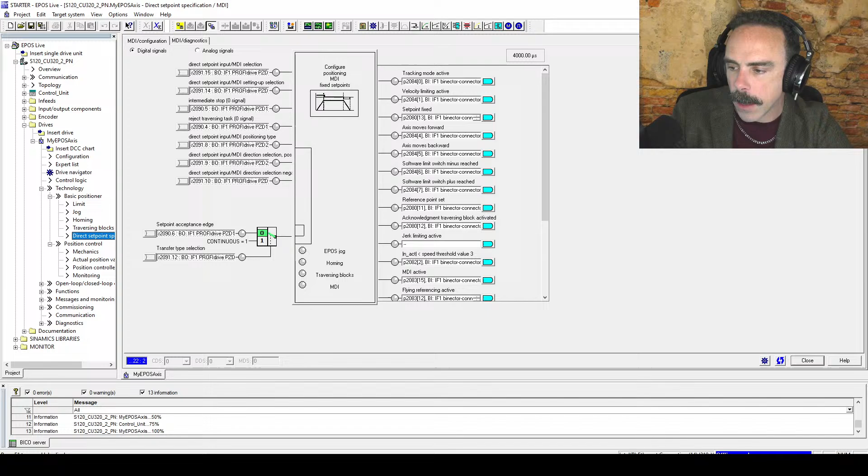That's kind of important. So some of the set points and things that we actually need - let's see - MDI mode. So MDI mode means that you're going to set this block up this way. Clear this. The SINA_POS block goes through and sets some of these signals to activate, because the electronic positioner has a couple of different other functions: it has jogging, it has this traversing blocks function, it has homing, and then it has the MDI block.

MDI, though, is essentially you're moving in either relative mode or absolute mode to a position according to acceleration and velocity. And you're going to set all of those set points. You're going to turn on MDI - you're going to turn on, so it's going to be 1 here. So you're going to be on here. You're going to need to have this.

We're going to say positive, because think about it - if you put a positive here, that means that if you have a negative position and you're doing an absolute position, for example, that positive doesn't really matter. It's going to go to that absolute position.

And so you're going to set this to 100, right? You're going to set this to your position set point. You're going to set this - and remember, these are in load units - so velocity set point in load units per minute. And then this is acceleration and deceleration override, these are in percents. So let's just say 50%.

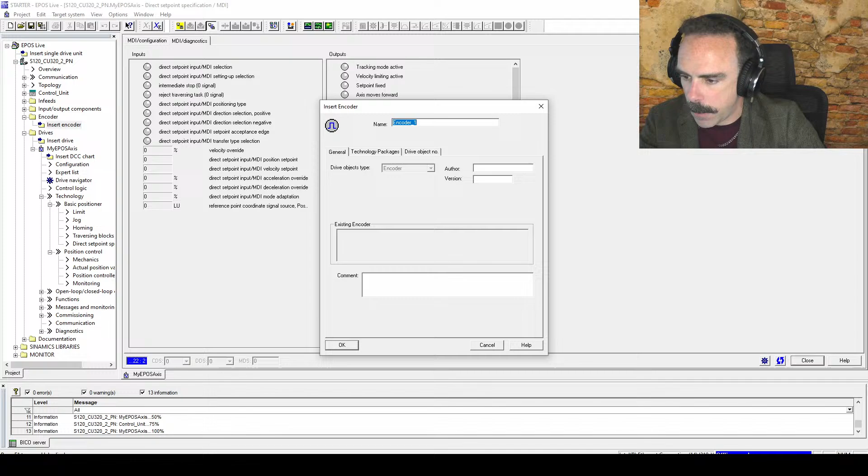I think I talk about setting up an encoder in one of my older live streams, and it would have been in starter. But that's probably one thing I could show you real quick, because in this one we're gonna have to call it encoder 2, because we set this drive up as... all right, hold on, this is an external encoder. Let me do this, sorry, I'm doing something wrong. So let's go back in.

So let's do this. I'm gonna go back in and reconfigure this. So, because I selected this DRIVE-CLiQ right here, because I set this up as a DRIVE-CLiQ motor, it's expecting to pull that in. So let's go back and change this little selection here, and I'm just going to select a standard motor from the list.

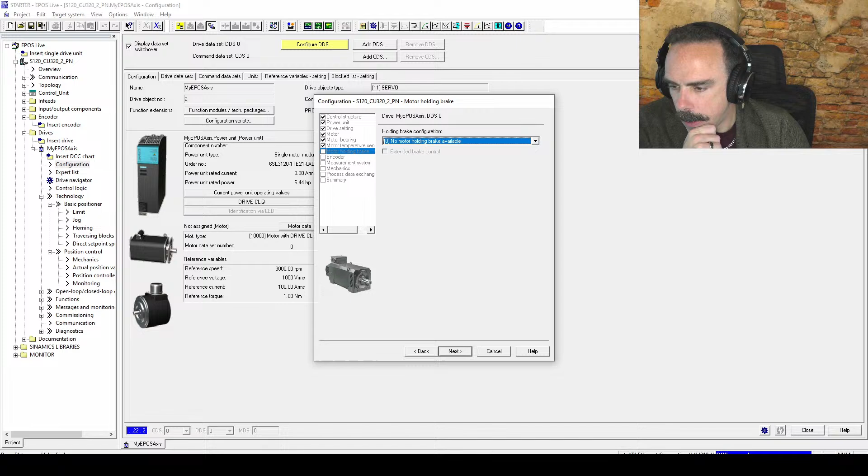1PH8 random thing. Make sure that... 9 amps. There. No, there, just trying to make sure that there's not going to be a problem with that. That's fine, that's fine. No holding brake.

So here is where, in the actual start of setting it up initially, here is where you can set that up. This, for example, before was that DRIVE-CLiQ encoder. This is you now saying that it's going to come in with a signal module, and what type of signal module will be based on what type of encoder you pick. So SM1 just means it's going to come in with like either an SMC 20, SMC 30, SMC 40, something like that for this.

And so we can either pick from our list here and say that we have like a 2048, a decent Dynapar 2048 pulse encoder, and it's on the list. That's good there, and so that's a standard encoder from the list. You can also go and select, just enter the data and select that.

Oh yeah, so this is where you can get into the more advanced configuration, because on this, your encoder, not only are you picking what type of connection you're using on your SMC module, but you're also connecting the voltages. So here's where all of that encoder setup is.

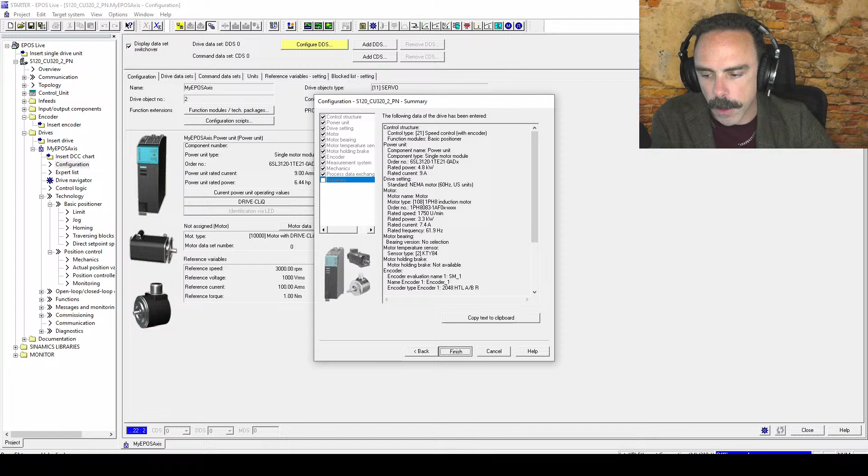Say, and we're calling that encoder 1. We're going to use that for our position control. We've done all this before, Siemens Telegram 111, got everything, we're good to go there. So, cannot be wired or stored in the component box.

So now, because that's coming in on a SMC module, we need to go to our topology, which is topology here, and we need to make sure that we have our encoder 1. We need to connect it to wherever it's actually the DRIVE-CLiQ cable, that cable from the top of our drive needs to connect over to the SMC module, and that's where you would connect that in. Now, one thing that I will go back to about configuring the encoder, okay?

This screen here is, if you go underneath your drive axis and configuration, pulls up this screen. You can click encoder data and it brings up that screen that we were kind of working with before.

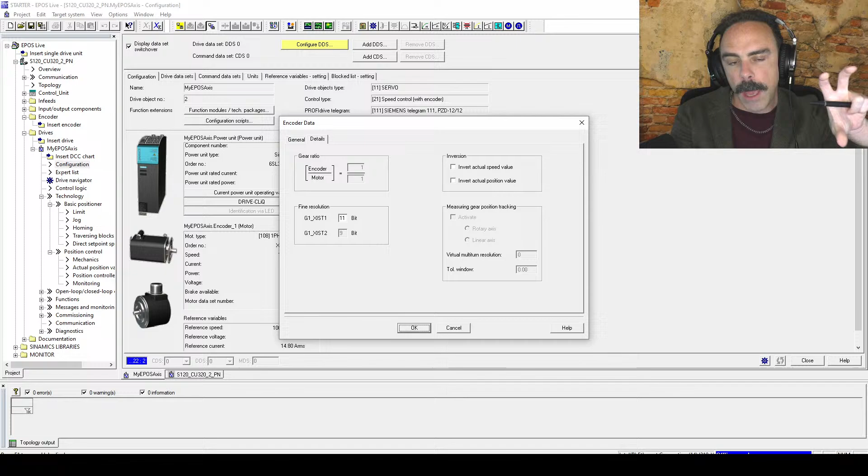Here is something, this gear ratio - there's a very rare instance where you have some sort of gear ratio that is in between your encoder and your motor revolutions. So if for some reason the gear ratio, or the encoder is like an external encoder, and your axis is here and your encoder is not physically one-to-one coupled to that, you would have to put this in here.

So the way you would do this is you actually have to go in manually and do this. I don't know why it's not available on this right now, but I'm just hovering over that, and that's P432, that's P433, and so have that plausibility check. We're gonna put it in at the terminal.

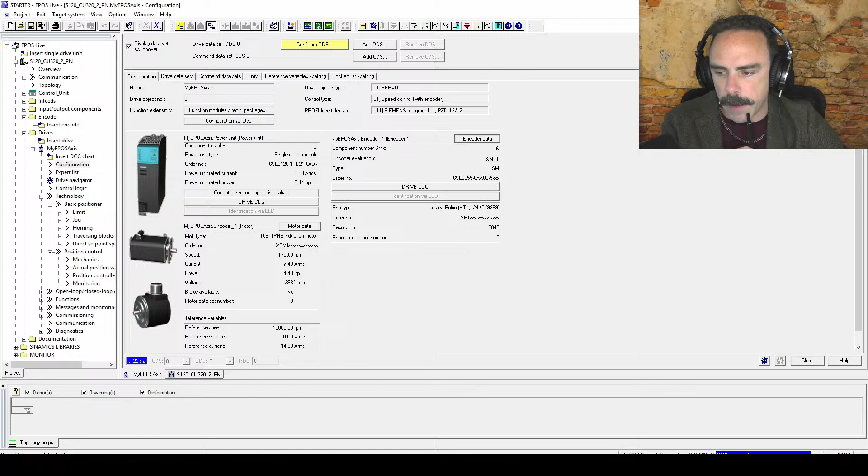If you notice when I did that and I clicked on the encoder data, it changed my encoder number to free. So it kind of changed from that standard encoder from the list. It changed it to selecting that other box.

So let's take, what was that, 432? Let's open up our expert list real quick. Let's click over in this column. Let's type 432. Goes back to gearbox factor, and if we notice, so selected gearbox type, and P402 prevents the value from being changed.

So we're just chasing through this. So P402, 1-to-1, and then so there's different gearboxes. So like if you have some sort of gear ratio, like you have a nylon gear wheel on a pulley, something like that, here's where you change that, and that's in parameter 402.

Now I will say I can change all of this stuff right now, because - say it's a 2-to-1 ratio like that - I can change all of this at will, freely, because I am offline.

If you're online with this, you would have to go first and change parameter 10 to encoder commissioning. So you would change this to encoder commissioning, and that would lock out the drive and say, hey, I'm changing stuff on the encoder, and then you could come back down here to 402, change that, and then 432, and do that and change those ratios. So that's how you would adjust those values in Starter.

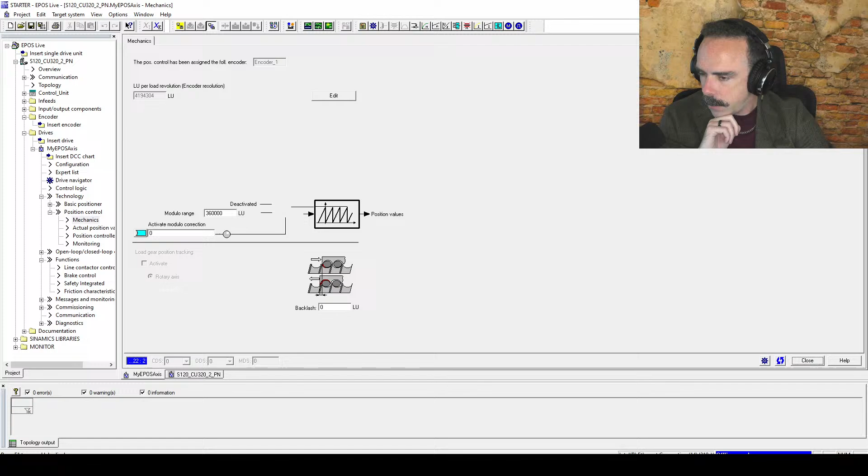Mechanics. That'd be here. Yeah, there's a place, maybe it's in the setup, I believe, where there's one of the screens in the configure DDS that... you're welcome for the explanation. I appreciate the feedback. But in the configure DDS, there's a place where you can select the encoder that you want to use for the position control. And by default, you only have one encoder. It's on the motor, and that's what you use.

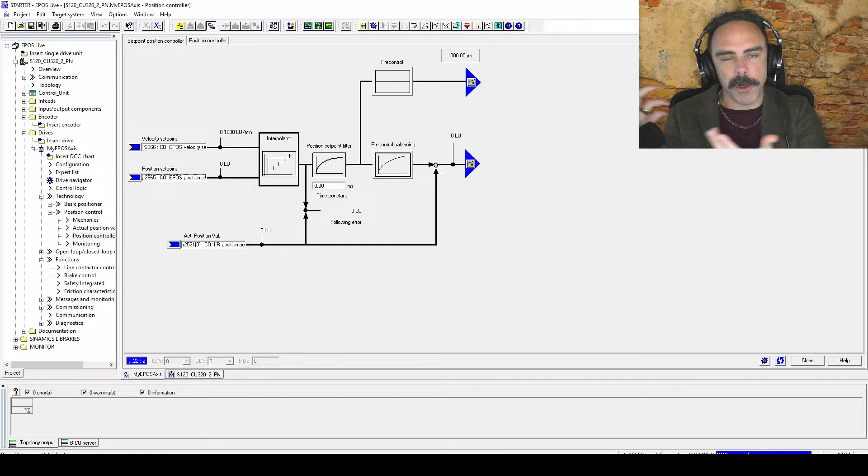If you have a situation where you have an external encoder, like a linear encoder on a slide rail, those are nice. You can set those up and use that for the position, and then you want really tight speed control on the motor, so you use that for the speed control, because speed control is related to the actual motor speed. So yeah, you can do it that way. Or you can always separate out your encoder and use the position and the speed from that external encoder. They're infinitely configurable, put it that way.

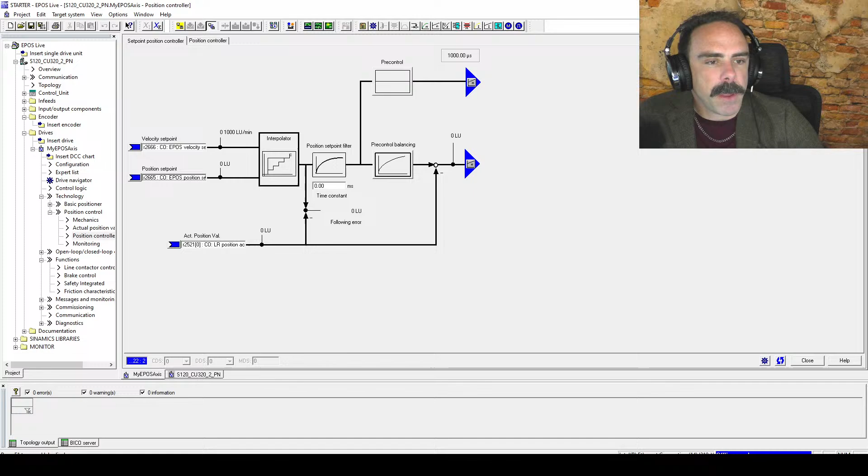So we're hitting on 3 hours. These 2 hour streams have been getting longer and longer. And the thing about it is, today I felt like I didn't really have that much to talk about. We go for 3 hours. So, well,